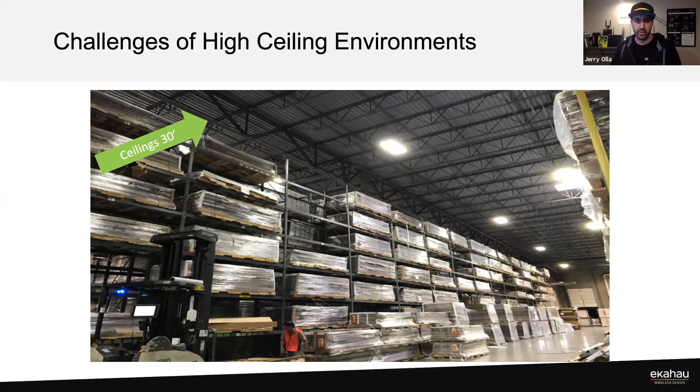Yeah, so some other considerations, besides that 30-foot high ceiling where we're going to place APs, we also have some open space that we need to deal with, and that's created because often we have these metal racks that extend up pretty high, but they don't go floor to ceiling like we do in a typical office space. So they're not going to be a complete wall from an RF standpoint.

And if we have these high ceilings that are 30 feet up, traditionally we put the APs in the ceiling, right? And if we are using omnidirectional antennas, now we have this open space where there's no attenuation, right? The APs can hear each other every time an AP transmits. Every AP that's on those channels or adjacent channels potentially could be hearing that other access point. So there's some things that are unique to these kinds of environments that we don't often have to think about or worry about in an office type space.

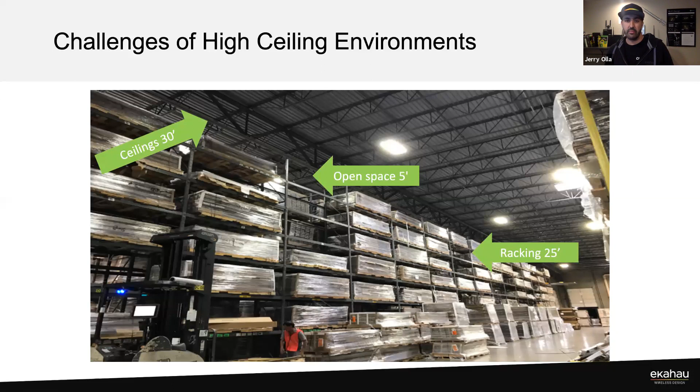So yeah, what are some common mistakes that can occur if we don't factor some of that in? Taking a look at this photo here, this Wi-Fi deployment, it's kind of hard to see. It's a pretty big space in a pretty small picture, but anything that jumps out at you guys, Joe or Scott, of maybe some mistakes in here that you would recommend not doing? Well, first off, those APs are pretty dang close together.

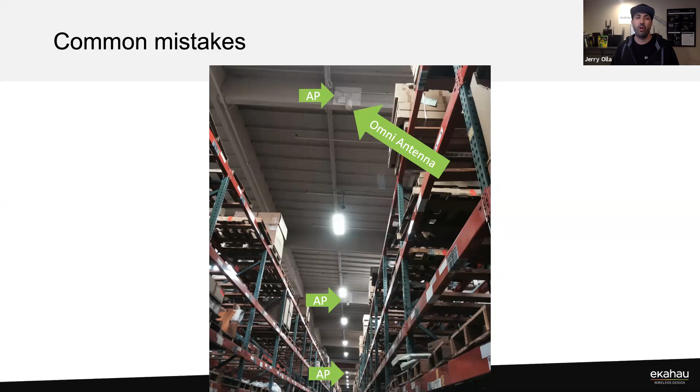Yeah, so I think what you're talking about is you've got an AP here. It's got an omnidirectional antenna on it, not super high gain, but higher gain than your typical little rubber duck antennas. And then we've got another one that's kind of hard to see here. And if you look really closely, there's another one down here. So where you're standing in one of these aisles, we actually have 3 APs with omnidirectional antennas. They're all audible. What potential problems could that create?

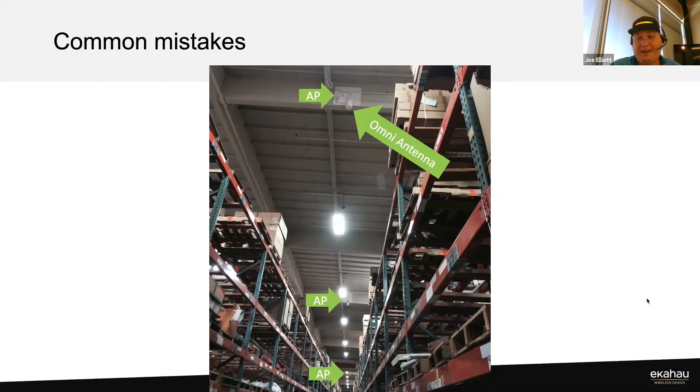For my environments, I've seen it create a bunch of channel utilization and contention issues. Also, because of the racking not being a full wall, I've seen it where every AP in the entire warehouse can hear the other APs, and that's in a 1 million square foot warehouse. So if you can hear 190 APs, it's not a good day for anybody.

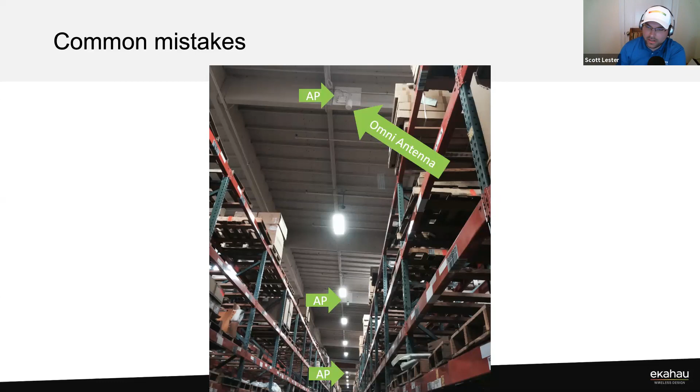Yeah, exactly. I think one of the key things that Joe touched on there was, for those of you that have taken ECSE, you remember the want, don't care mentality, right? Of signal levels and things of that nature. The other important thing to remember is these omni antennas in this particular instance are truly omnidirectional antennas. You see some manufacturers that have omnidirectional antennas built into the access points that have electronic down tilt built in already to help prevent that AP to AP contention and hearing as much from adjacent APs.

However, in this case, when you use these particular omnidirectional antennas, these oil cans, if you will, are just strictly blasting out an omni pattern everywhere, right? There is no down tilt built into these typically. So that's something else to be aware of: choosing the right antenna for the job. Yeah, very good point.

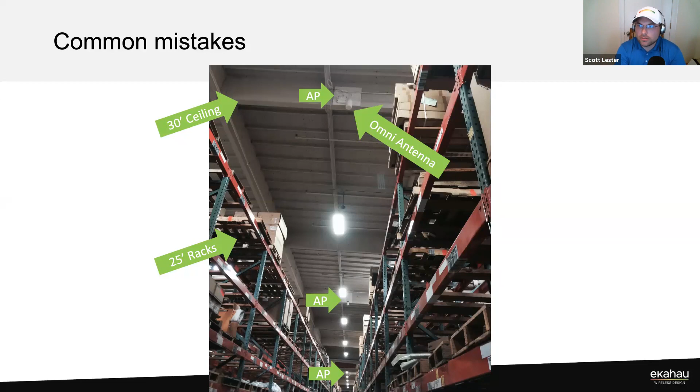All right, so let's talk about covering these large areas. Here we've got a photo. This is a very long, open aisle, pretty wide actually in comparison to some aisles. What we're talking about is, how do we cover these large areas with Wi-Fi? Do we just place a single access point in the middle of the room with an omnidirectional antenna on there? You can actually see we've got one right here in the photo. It's pretty tiny in this image, but is that enough to cover these large areas?

And actually, if we don't have attenuation to work with, we can cover a pretty large area. Would you agree with that, Scott? Can we cover a pretty long, large open area with a single access point? Yeah, absolutely. Just kind of a side discussion around that answer: I do a lot of work in LPV environments like stadiums.

If you put an omnidirectional antenna at one end of a stadium, you can hear that even at lowest power up to 300-400 meters away. In an open space, there's nothing that diminishes that signal, that ends that propagation. So short of free space path loss, that signal is just going to continue on forever.

So if we need to cover these large areas, what are the options? So far we talked about omnidirectional antennas and placing these things on the ceiling. Is that our only option? That's what we're used to from typical indoor environments with office spaces. We're usually using Omni antennas, placing the APs on the ceiling, and calling it a day for the most part.

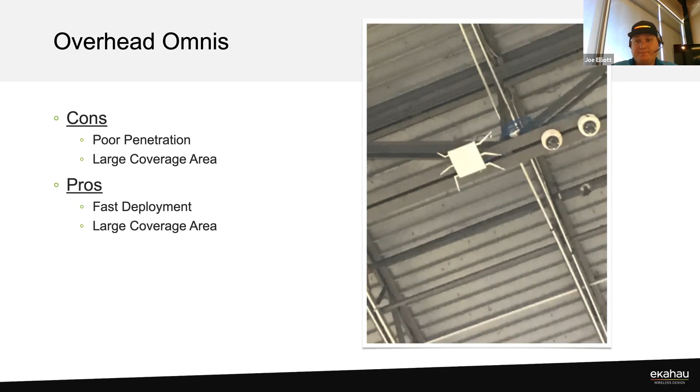Yeah. But it's a good point, Clayton. That's another consideration that's not directly on the RF side, but it obviously greatly impacts the RF if we can't pull a cable long enough to where we want to put the AP because it's outside of the spec of the distance that we can run that cable. So yeah, there's definitely a lot of challenge that adds as well.

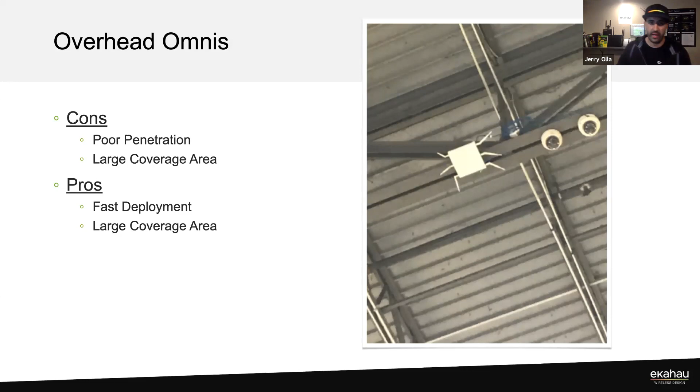Scott, you want to kind of dissect what we're looking at here? Yeah, sure. So this is actually talking about overhead omnidirectional antennas. This is a survey that I did recently of a facility that had that exact mounting scenario. In this particular case, they had the AP mounted on the ceiling rail with the oil can type AP antenna mounted to that, interspersed throughout the warehouse. As you can see, it was essentially 2 per aisle, and they would skip a few aisles and then do 2 more per aisle, spaced apart. This facility was probably somewhere around 400,000 square feet or so.

But as you can see, we'll move right to left in this image. We'll start on the right side of the image where we see a lot of green. A lot of green is good. The Hulk is happy. But if we had the opacity of the signal propagation turned down some in the image, what you would notice is that in this spot, he's moving the cursor around for me, if you'll move to the center of that green blob right there.

So that whole area on the far right of the image is essentially just an open area. It's going to be some type of packaging area where they're putting things in boxes, or they're stacking pallets, putting merchandise on the pallets and things of that nature. So in that area, the closest access points with the omnidirectional antennas, we see great propagation. No problem, signal's good. This is obviously from the 5 gigahertz side, which is what I typically recommend people design for these days.

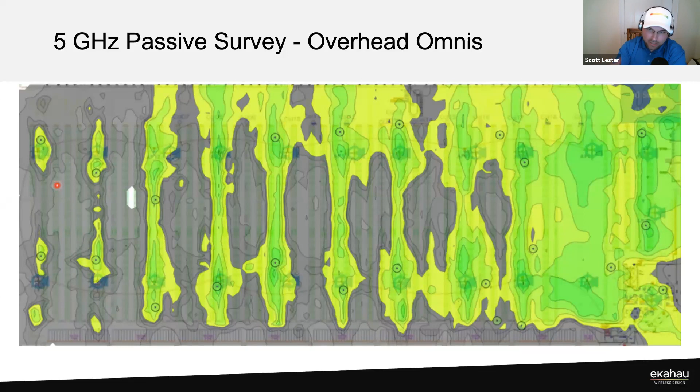So this particular facility is a distribution facility, and has a lot of metal objects inside cardboard boxes on the shelves. So you can see how those materials affect that signal propagation from rack to rack and row to row. Yeah, it's pretty interesting to see the difference laid out like this across the entire building, where it sounds like you've got the same APs, same antenna, potentially even the same transmit power configured on all these, but drastically different results from an RF perspective.

And all these measurements are being taken boots on the ground, about 1 meter or so off the ground. So we've got to get that signal down from the ceiling all the way down to the floor. In a big open area, this design and solution appears to work quite well. But as we add all the density of the objects and the racking, obviously that changes things very drastically. So it's pretty interesting to see, from right to left, how that changes.

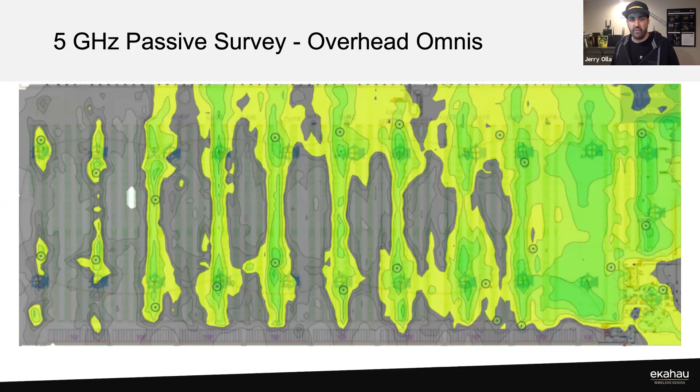So I laid those out, and then I tried to utilize omnidirectional antennas to cover the entire facility within reason. And when I say within reason, there were given budget constraints and things of that nature. So I figured out the maximum amount of access points that I could have used in the facility based on available budget, propagated the design, and did as best I could.

And you still see how in certain areas of the warehouse you start getting tremendous signal loss, even in the predictive phase. And many of us that have done Ekahau for a while can tell you Ekahau's predictions are only as good as the information you put into it. This is based off the most accurate information we could come up with, and we still saw significant loss. So you transpose that into a real world deployment, and typically it'll be close, but in some cases in warehouses you're going to see even worse going from predictive to an actual deployment.

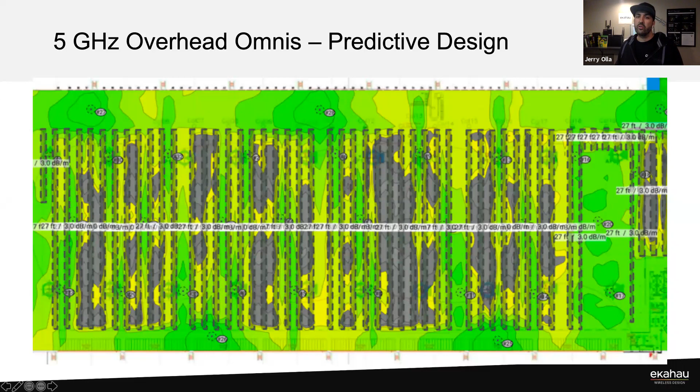I'd say the old school way of doing it, which is the way I still do it, is using the wall tool to define the racks. I would say both can be correct as long as they're defined accurately. But yeah, garbage in, garbage out, right? So as long as we put the right values in those and define those correctly and understand how the tool works, either the wall tool or the attenuation area tool can be used for representing the attenuation of the racks.

All right, so the other antenna option that we have is end of aisle. So this is kind of an interesting one. This is one that I have seen some of our customers use. This is one that I personally have not had much experience using. Scott, is this something that you find has been pretty effective for you? Is this something you use pretty often? What types of environments do you see this working better in?

So this is going to be probably my second favorite, if I categorize things, deployment method. Now, obviously, we'll talk about cons first, right? So the cons of using an end of aisle deployment is that you have potential obstructions. Okay, what do we mean by obstructions? I'm sure everybody's already figuring out, right? Those forklift drivers, you might as well put neon signs on these things if you put them where a forklift can get to them, because I can almost guarantee you in every warehouse facility, you're going to get a few of these hit.

In this particular case, you can see that the access point is mounted to what we call a co-location bracket. We've got the access point there in the middle. You can't really see the antenna, but it's going to be on the bottom of that tilted metal plate there. And it's mounted to just a standard double gang wall box hanging off of the all thread.

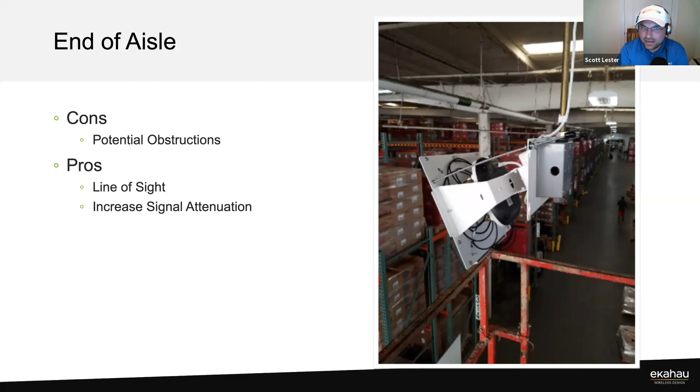And then a second factor is that I find that most access point manufacturers don't actually support the use of that particular antenna. And just a side note, obviously this is not something that the FCC polices very tightly, right? But I feel it would be amiss if we didn't recognize that, according to the FCC, in most cases, the antenna that's used for an access point has to be certified by that access point vendor for use with that access point. And that's mainly to make sure that propagation and the FCC limits are enforced properly. So just something else to remember when you're doing this kind of work.

Now, obviously, we don't go to the FCC and say, hey, can you check this out? I really think that warehouse is probably using an incompatible antenna. But it is something that technically, to the letter of the law, you have to be aware of.

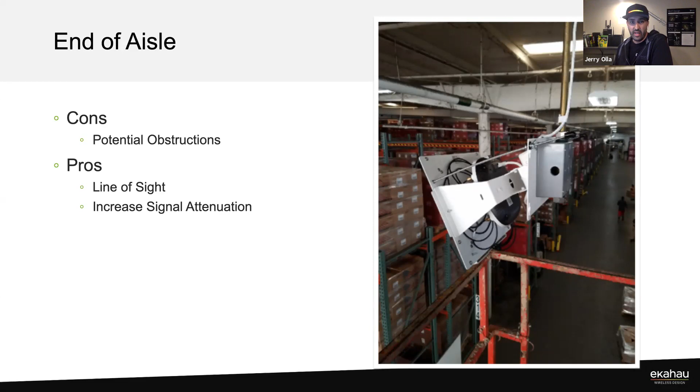Yeah, right on. So there was some interesting stuff during that conversation. I was following chat a little bit there. There's a lot of activity in there, but there was some mixed stuff. I saw at least one positive comment about a customer that did successfully deploy this radiating leaky cable. But there were a couple of people that said that it works good for DAS, but not for Wi-Fi. So there's definitely more options than we'll get into on the webinar today. But that's why we love having you guys on the chat, to introduce us to new things that maybe we didn't think about.

So this was kind of the best of both worlds. It gave us higher capacity. It gave us faster speeds because we're doing more than just barcode scanners, but our barcode scanners are also our least capable device. Gotcha. Okay. Yeah, and we'll talk about devices here in a little bit.

That's a good point. Everything so far we've been talking about is really the environment and the APs and the infrastructure, but there's a whole other piece to this equation, right? The client part of it. So yeah, that's a good point. Anything you want to add to this, Scott? Anything from your experiences? Do you find you're using this more commonly than any other ones?

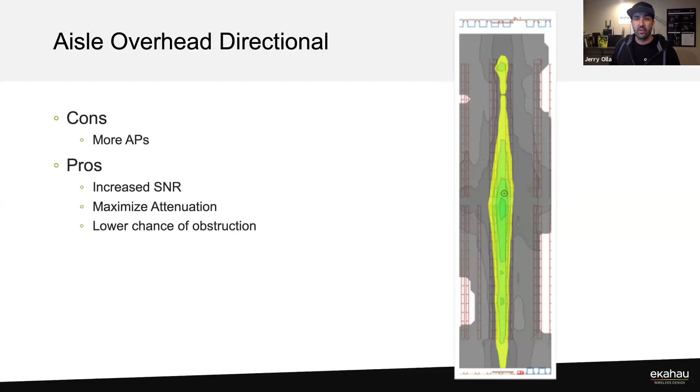No, that's awesome. So I think the real success here is when you look at it overall, right? So this is taking that same concept now of the overhead directional in that same warehouse that we've been using and showing with the previous slides on the omnidirectionals, and how much better the coverage is. I don't know AP quantity wise, I would assume you probably are going to need some more APs with this approach, but from an RF quality standpoint, you're going to get a much cleaner environment, right?

Yeah, absolutely. I think in this particular facility, we more than doubled the total AP count from where they had to what we went to. In some cases, depending on how the original design was done, it may be as much as 3x. So obviously, there is a much greater cost for this deployment method. But at the end of the day, you have to find a solution that works for the customer to meet the requirements of the project, both from a technical standpoint and a business standpoint.

In most cases, I've had a little bit of pushback from some customers on utilizing a solution like this. But this actually is done from the same drawing that the passive survey we first talked about for propagation for Omnis was measured at. So when you can show the customer in real life that this is what you're currently seeing, this is what we recommend going to, and this is why, and you show them attenuation loss between racks and things of that nature, right?

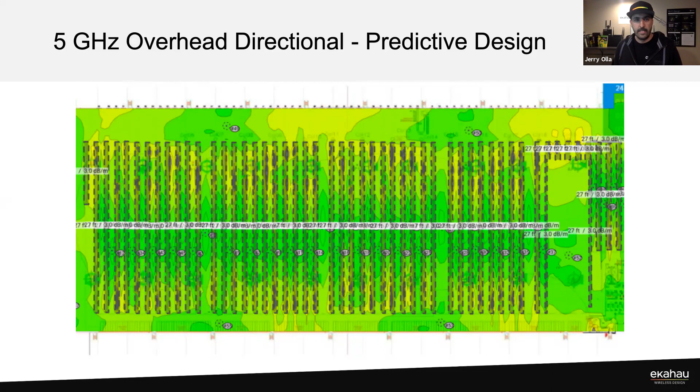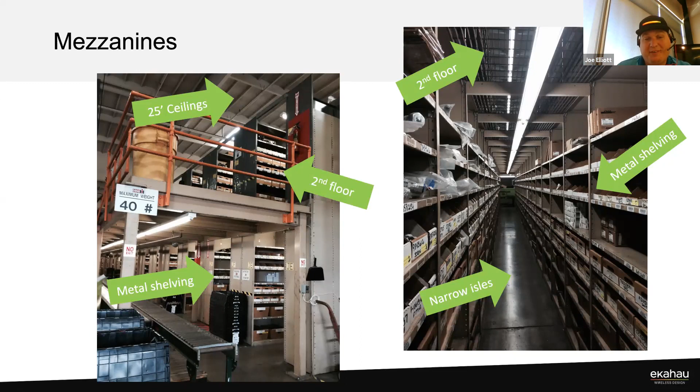So when I first designed it, they're like, oh, there's only 5 people that work in each level of this. I'm like, okay, that's pretty easy. Well, come to find out, during busy season, there's about 25 to 50 people per level of the mezzanine. All of a sudden we're not getting the throughput requirements that we need to be successful.

Yeah, so the interesting thing with this one is originally when I came into this project, they were really struggling to cover more than a couple aisles of this mezzanine. And this goes back quite a ways. This is a pretty large mezzanine. It's hard to tell in these photos, but you can see this thing keeps going pretty far. And shooting down the sides wasn't really an option, because just to the left of this photo is another tall rack, and on the other side is a concrete wall.

So there wasn't any easy way to do what we talked about before of shooting down the aisles. So the only option was to go overhead. The ceilings were about 25 feet. My concern was that this metal grid flooring above was going to block a lot of the signal. Thankfully, the spacing must have been wide enough, or it didn't have any impact on the signal. So I was able to shoot down from above all the way through the second floor down to the first floor just fine.

The tricky part was just getting above this racking structure for the cablers to get in and actually install these directional antennas. So I took that same approach we've been talking about, the overhead directionals, and we put several overhead directionals over the top of this mezzanine and shot down from above to below. So we were able to cover the second and the first floor with those directionals over the top.

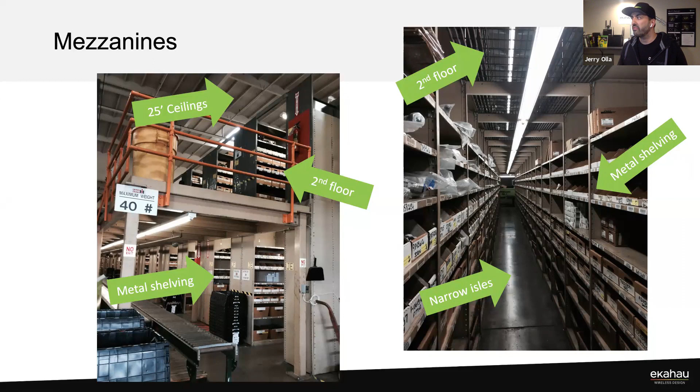And yeah, same concept. I think when you've got 2-story or 3-story, it depends on the flooring, obviously, is the biggest factor there. If you've got solid metal floors, you're going to have a hard time getting through that. You're going to have to come up with a different solution. Thankfully, in this case, with that metal mesh or metal kind of grid flooring, I was able to leverage that to get the RF through.

Well, cool. I think we're running a little bit behind on time, but I think this has been some good stuff. I wanted to just talk quickly about Wi-Fi design methodologies, and then see if we can apply some of that in some kind of a live demo here in the Ekahau application. So yeah, Joe, why don't we start with you? What is your Wi-Fi design methodology today? I don't know how much detail you can go into, but at least, what are some of the concepts behind that?

I'd say we're picking and choosing quite a bit. So we always do a predictive design through Ekahau. And then depending on the circumstance, like the mezzanine we were just talking about, I'll do an AP on a stick there every time just to make sure that we get the coverage patterns we need. But otherwise, we'll go through and deploy part of the building sometimes and do a hybrid, so you just validate that what Ekahau says it should be is what we're really seeing. And then we'll move on with the project from there. And once the project is finished, we'll do the post-deployment validation survey.

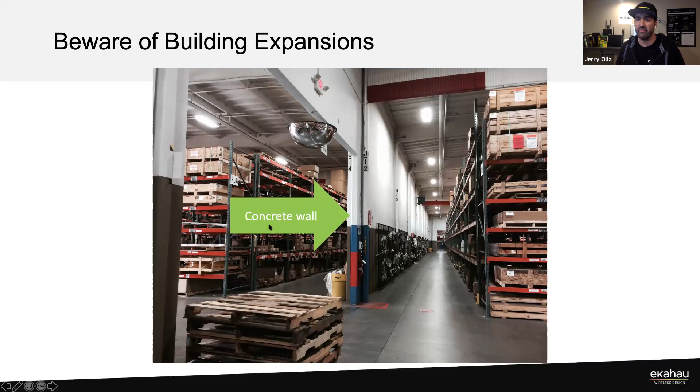Yeah, and that was an interesting one for us when they did the expansion. We had that external concrete wall, just like you're showing, and so this was before my time. They hired an external company, a system integrator, to come out, and they never accounted that was an exterior wall. So there's just a giant dead zone on both aisles going down that concrete wall.

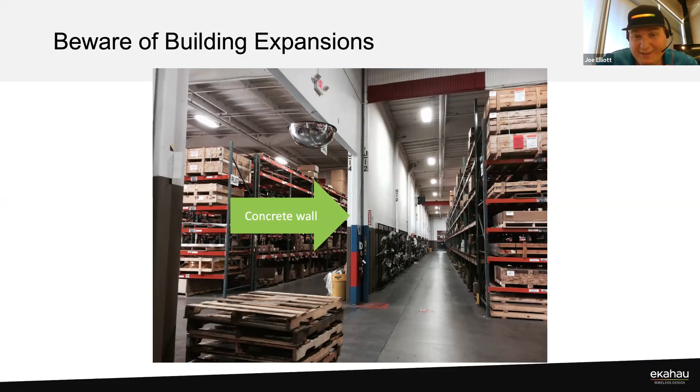Yeah. How about you, Jerry? Do you have a typical Wi-Fi design methodology? I'm sure it depends for you with all the different environments and stuff that you're working in. But if you had to try and kind of form that into a common methodology, what does that usually look like for you?

So for me, obviously we're going to do a little bit of probably every solution out there. So typically I'll start out with recommending a passive survey of the existing facility to see where we are. If this is a greenfield facility or a brand new facility where they haven't deployed wireless previously, then obviously we try to get as accurate a drawing as we can. The number one issue I typically face in warehouses in general is getting a map, and in some cases that's any map.

The more accurate the map, the better we can do our job from a predictive standpoint. After that, in that predictive phase we'll send somebody on site, make sure that if the facility is populated, we can measure the attenuation values and things like that to properly form our predictive. Then we'll go in and do an AP on a stick.

Now, I saw a question earlier. Somebody asked, how do you do a project like this when the customer doesn't want anyone on site? They just want to provide a drawing, and then they want you to do a post-installation validation survey to make sure that what you put up worked.

In that case, what I always recommend is encourage your customer to let you come on site, even sometimes if it requires you to take the expense out of pocket initially to make it up on the back end of the project. We really cannot do our job effectively as professionals, even with amazing tools like Ekahau, without having as accurate information as we can up front to do the design with, and then test.

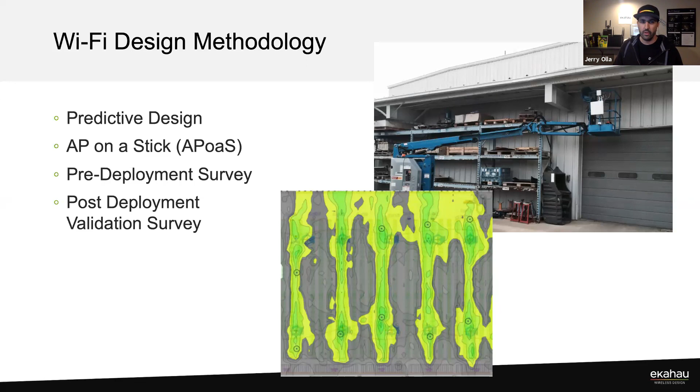One thing I just want to point out, this seems like a no-brainer, but if you are using a lift, make sure it's out of the way. Make sure that the lift isn't impacting your access point, and that you have the antennas mounted in such a way that it's not traveling through the lift. Yeah, that's a good point. You do have to take that into consideration with your stick. If your stick is made out of metal, you want to make sure that that's clear of where you're measuring that signal.

Okay, so a couple other things. We talked about stock fluctuations. We showed the impact on the heat map, so I won't really spend much time on this. But make sure that if you're surveying, pay attention to what the stock level of the warehouse is, and talk to the customer about that and see, is this normal? Is this low? Is this high? And take that into consideration in your design and your validation.

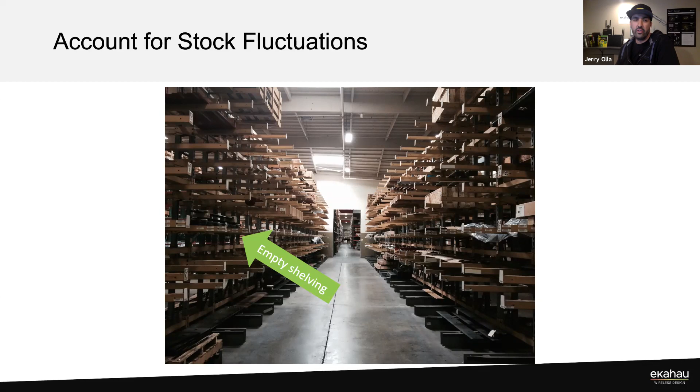This is one of these things that we've kind of overlooked a bit in this presentation, but I think is very critical: not all devices are created equally. Here's two different barcode scanners, an older and a newer one, right next to each other. The older one probably has been dropped a few more times than the newer one. And this is just walking around with these two devices. So don't just grab one device. If the customer has 5 different models of devices, you want to test with all 5 different models, and maybe even a couple of each model to really get a good baseline of what the capabilities are of these devices.

Is it something that's fixed to a forklift with larger antennas, those kinds of things? Or is it a very small handheld device that somebody could be putting in their pocket, or sticking somewhere, that's going to have worse receive sensitivity from that? But yeah, here you can see we have a pretty big dB difference between these two devices, and you can notice the impact on the transmit retries with that as well.

Jerry, I'll add one thing too on the devices themselves: not only be aware of what channels they support, but try to find the documentation for the device itself if you can. There are some scanners out there that I've seen, I believe they were Intermec scanners, some of the older models in particular, that supported all 5 gigahertz channels. However, when you started drilling down into the details, they supported UNII-1 channels at, say, 50 milliwatts transmit power. They supported UNII-2 channels at, say, 25 milliwatts of transmit power.

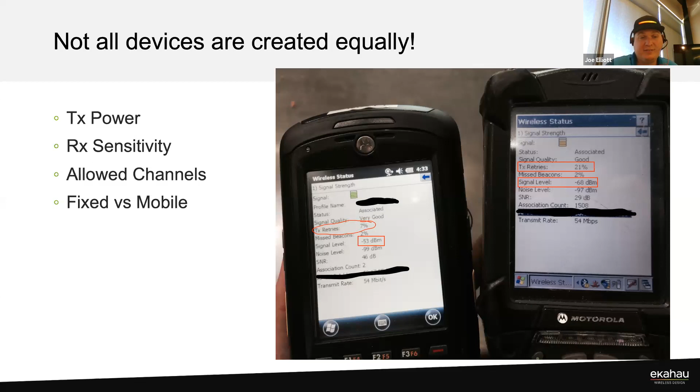Yep, definitely. Good tips. Well, I see we are already at the top of the hour. It took a little bit longer to get through that content, but I think we had some really good dialogue with the audience and questions. Clayton, do we have some questions that we were not able to answer yet? Oh man, a gazillion. Just a couple, huh? Yeah, I've been trying to type as we talked, but apparently this is a popular topic.

Yeah. So there were a couple that are very popular here that have been addressed. One that pops out to me here, again, going back to attenuation areas versus walls, using a wall to define the racks in predictive designs.

Yeah, so let's talk through a couple of these questions, if it's okay with our special guest experts here. Do you guys have maybe another 10 or 15 minutes to stick around and try and answer as many of these questions as we can? I'll stick around. Awesome. That's gonna greatly change the hourly rate that you guys are paying. We're going into overtime. I don't know if we can afford Scott's overtime pay.

All right, so here's the first question from Nick. It looks like it was the most upvoted question. What do you tell a customer who insists that he does not want an on-site survey? We have one who wants predictive modeling and an exit survey. We know that this is not a good idea, but what do you tell a non-technical person that will convince them otherwise? Very good question.

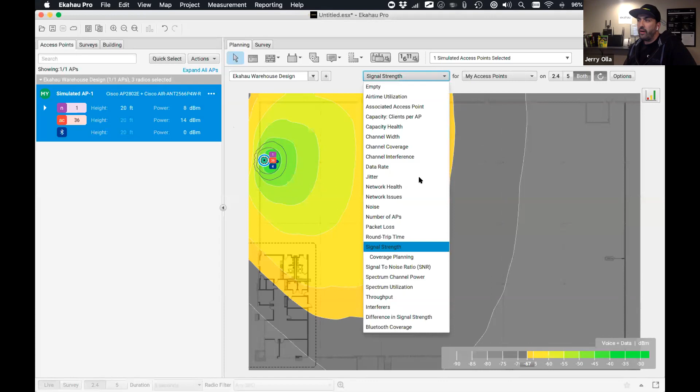Yeah. So the attenuation area is the best way to account for rack width. That is actually something I think we can do a quick demonstration of. Joel, are you still on the line and able to? Yeah, I totally am. So you want to demo the difference between walls and attenuation areas? Is that what you want? Yeah, exactly. So I mentioned this during the slides of how do we account for those racks, the attenuation of the racks, and there's two different ways that we can do it in Ekahau, right? Either the wall or the attenuation area. You want to show how we would use either one of those? Sure.

Yeah, so let's do a wall first. Scott and Joe, I might have you guys call out some attenuation values, because I don't have any warehouse experience, so maybe you can tell me some realistic values to put in here. So the first way is to use a wall. With the wall tool, there's a warehouse shelf preset in here, and by default it's going to wipe out 27 dB as RF passes through it.

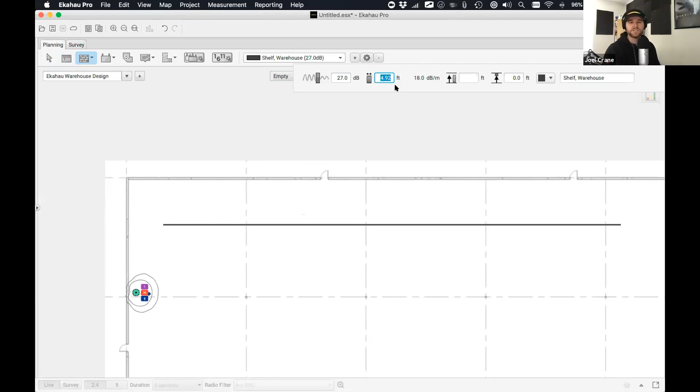When you draw a wall, basically you're drawing a line from one end to the other, and we're going to predict what happens to RF as it passes through that. You can also define a width. If we edit that, the total width of this is currently 4.92 feet. Scott and Joe, is losing 27 dB through that realistic at all? What's a realistic value to put in there?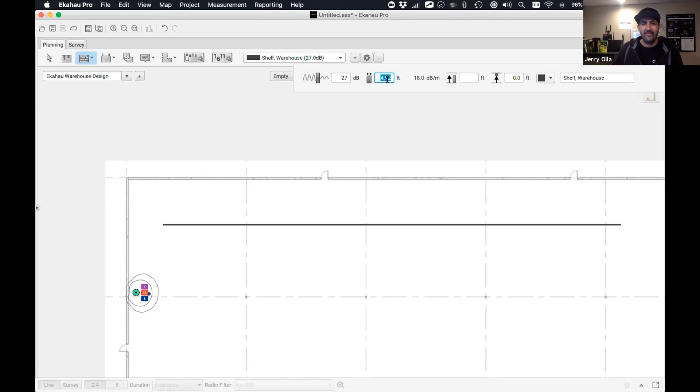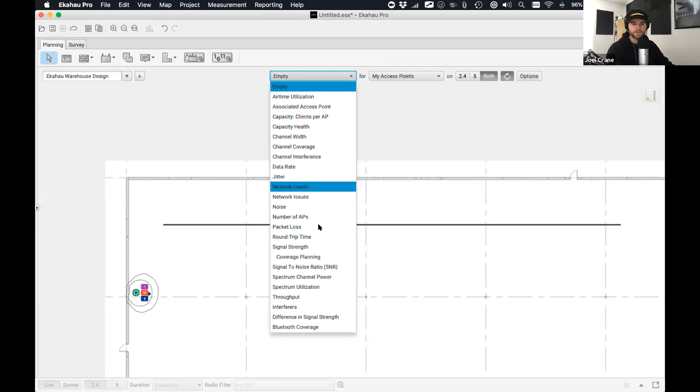And so what's a typical warehouse width of a rack that you would see? Jerry, what's a pallet? I don't know off the top of my head, but 7-8 feet total, maybe. So 8 feet is what I generally design for. Okay, so we'll say 8 feet, and now let's turn on our signal strength. We've got a directional antenna placed 20 feet off the ground with 45 degrees of down tilt. You can see I've defined those options right here. That's what it looks like when we use a wall.

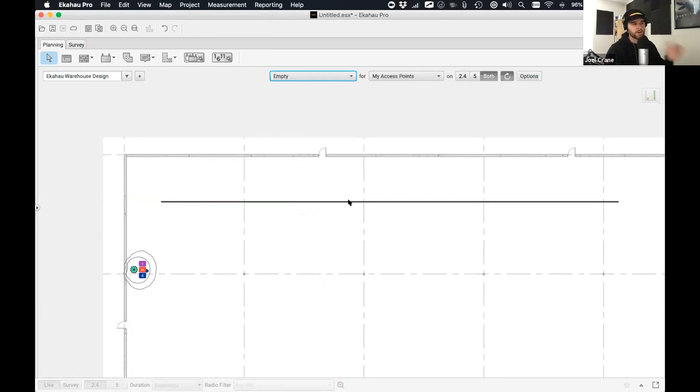Remember, we've defined the height, the width, and the total amount of attenuation as RF passes through that. The other way is to define an attenuation area. Instead of drawing a straight line, we can draw a box, a long rectangle, and change what that attenuation area is. We'll grab the warehouse rack here. Attenuation areas work a little differently: how thick is this in total, and how many dB are we going to lose per meter as RF travels through it.

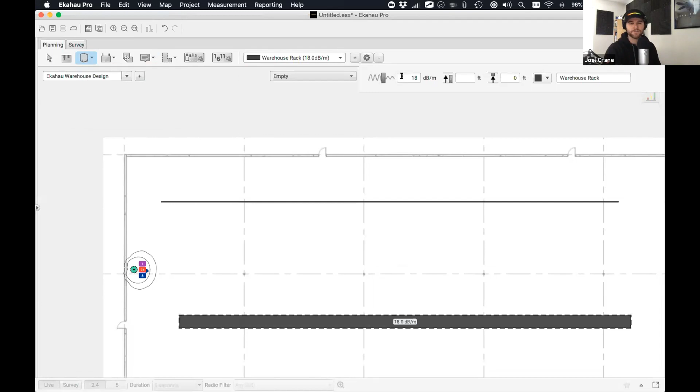Notice this says we're going to lose 18 dB of RF per meter that we travel through it. So the thickness is defined by how wide your attenuation area is. We could grab the scaling tool and see what I defined there. So I defined a 9 foot wide rack there.

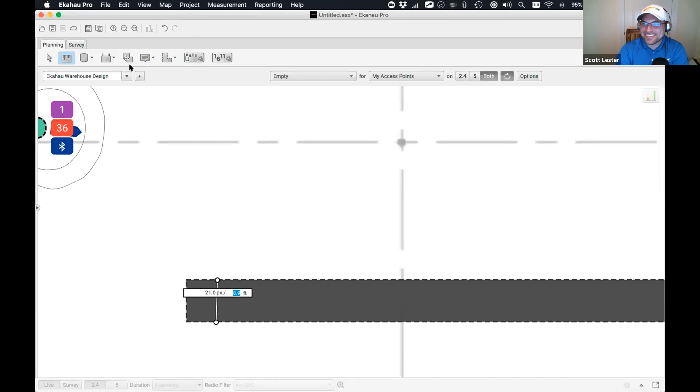One thing that can make that easier: I'm doing this in feet, or freedom units as I like to call them. But it's a lot easier to calculate if we switch over from feet to meters. Now when we look at how wide that is in meters, that's 3 meters wide. So you can basically do the math and figure out what that's going to look like in the real world.

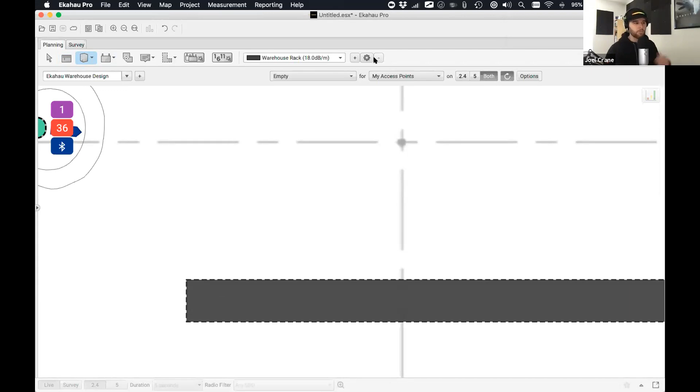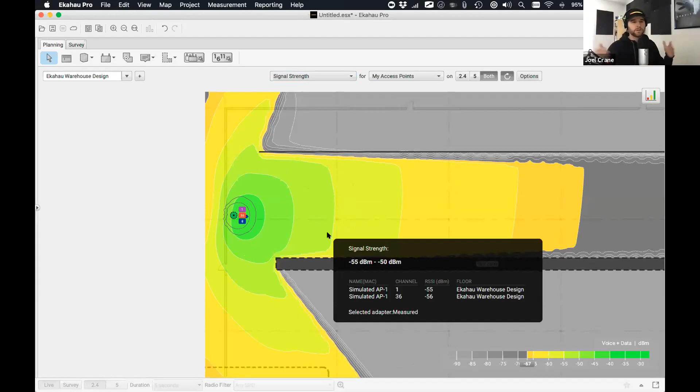So let's just run the signal strength visualization one more time. And there we go. So now you can kind of see two different ways of doing the same thing. So Jerry and Scott, what is your preferred way of handling racks in warehouses? Do you use walls and make them wide, or do you use attenuation areas? Or do you do both?

I mostly do walls, and then copy and paste is your best friend if you have a lot of racks that are the same length. So you'll kind of define one thing. We can do that with, so here I just did a Control C and a Control V, and now we can start placing some, and we'll do a couple with the walls as well.

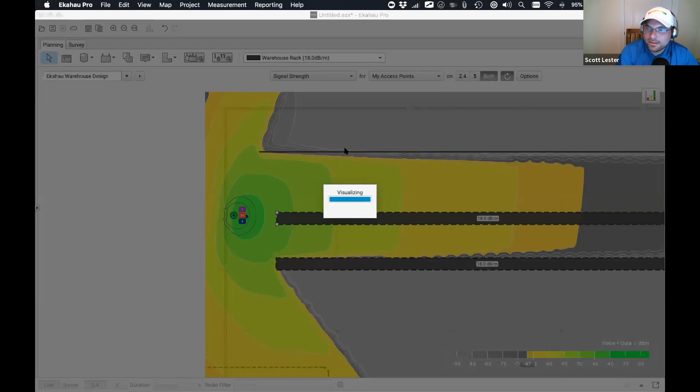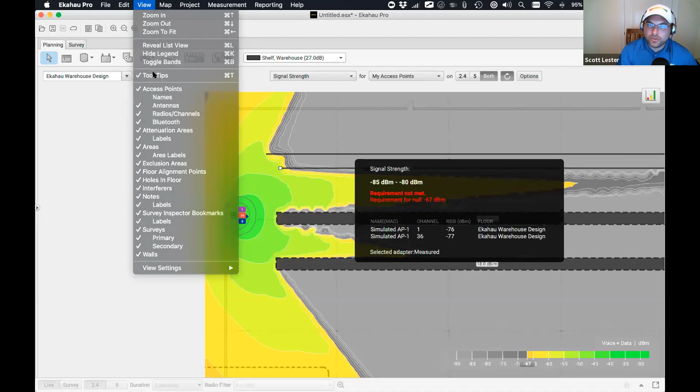Well, I think what I use is pretty evident. I like attenuation areas better. I feel like from a graphical standpoint, it does a better job of actually representing what the actual width and all of the rack space looks like in the environment. And obviously from an integrator standpoint, a lot of what I do is provide reports and things of that nature to customers to represent these things in real life.

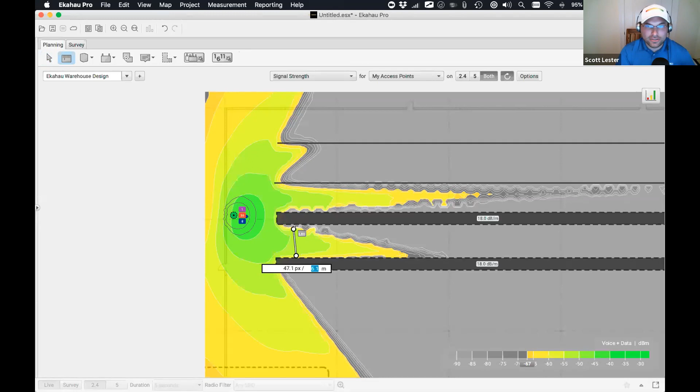And sometimes if you use a wall, even though they have the same identical attenuation values between the two, it's a little bit easier for customers to see the attenuation area and immediately understand what it is versus just seeing a wall drawn into the picture. Yeah, absolutely. That is a pretty compelling argument for why to use attenuation areas versus walls. And I'll add on to that.

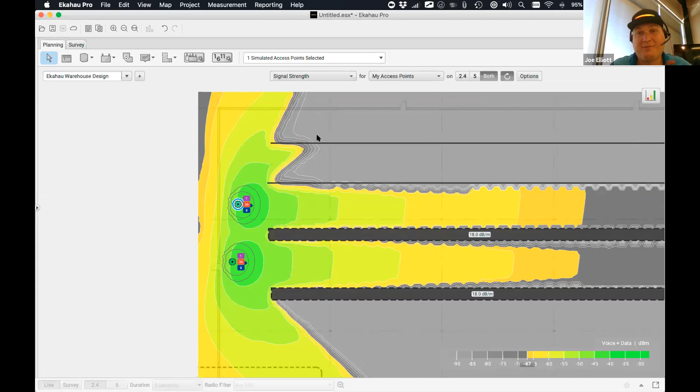Scott is in a different situation. I almost never generate a report whatsoever because it's only for internal use. So it's whatever is easiest for me. Totally. Yeah, and I'm with Joe. I feel like I'm kind of stuck in my ways and doing it the old school way, because the area attenuation tool is newer than the wall. We've had the wall attenuation tool much longer than the area.

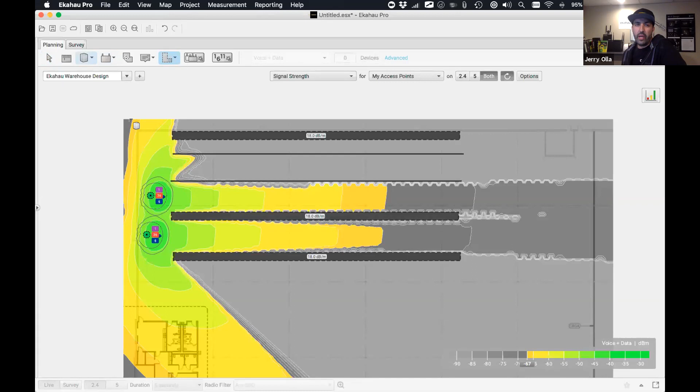So I started on walls and just got used to it and kind of learned the quirkiness of that, and know how to work around those things. So I guess I'm just kind of stuck in my ways. I think both work well. You just have to understand the differences between the two.

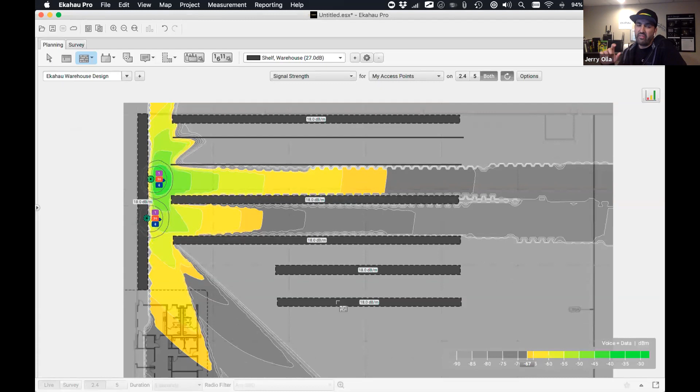The biggest mistake that I see made when using the wall tool is people draw a wall around, like a box around the entire rack. Yes. And you see how Joe just drew a straight line and defined the width of that. That's the proper way to do it. You don't want to draw a box around there using the wall tool, similar to how the area attenuation tool draws a box, because now you're saying there's attenuation in both directions of that wall around the box.

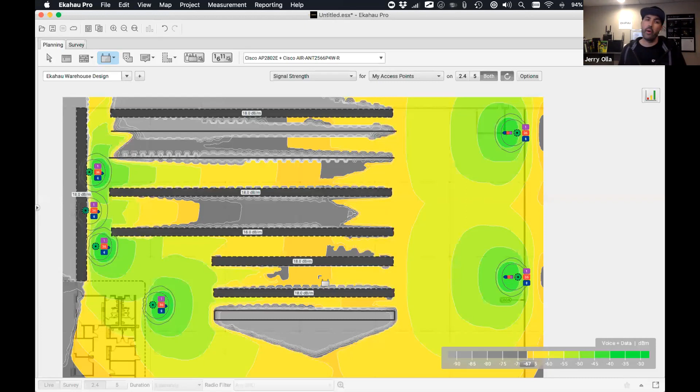Well, and think about it too, not only do you double the wall, so you double the attenuation, you actually have free space path loss calculations in between those two walls as well that make the attenuation even greater. So you're not just doubling it, you could be over doubling it. Actually, in all cases, I should say. Yeah, so there you can see Joe drew, using the wall tool, that box around the rack, and you definitely don't want to do that. That's definitely going to skew your results.

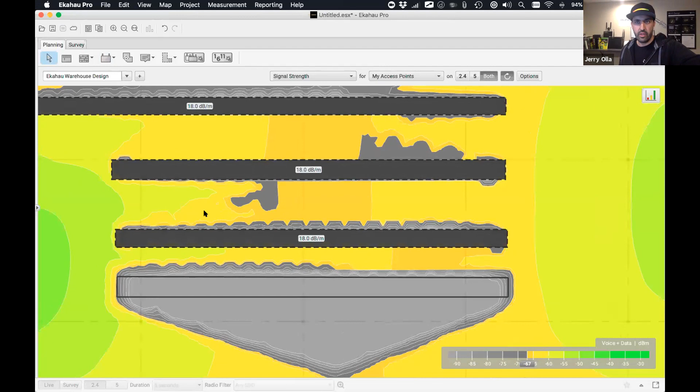I did see a couple of things in chat real quick here before we return to the questions. How do we define that directional down tilt that we were talking about? You want to show that real quick, Joel? Really great question. So I did that ahead of time when I was setting up. I had a feeling that we were going to do a quick last minute demo.

So when I place a simulated access point here, you can set the height right here. And this is brand new in Ekahau as of yesterday. By default, all two, or in this case, all three of our radios get the exact same height. They're all 6.1 meters off the ground.

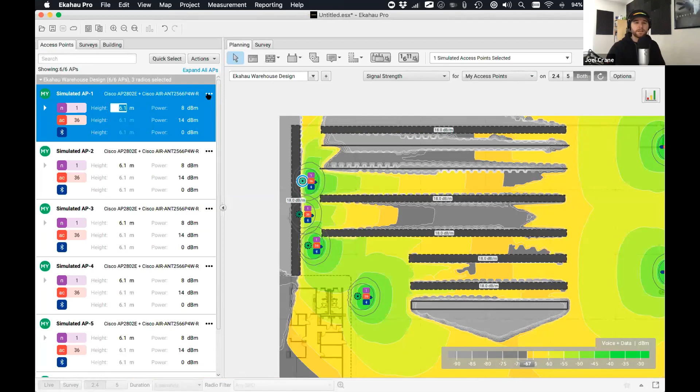That's about 20 feet. No, I did not do that calculation in my head. I can't do that. I let Ekahau do that for me. So we can set the height right there, so they're 20 feet off the ground. And then if we click on the ellipses icon here, there we go. We can actually define the down tilt right here.

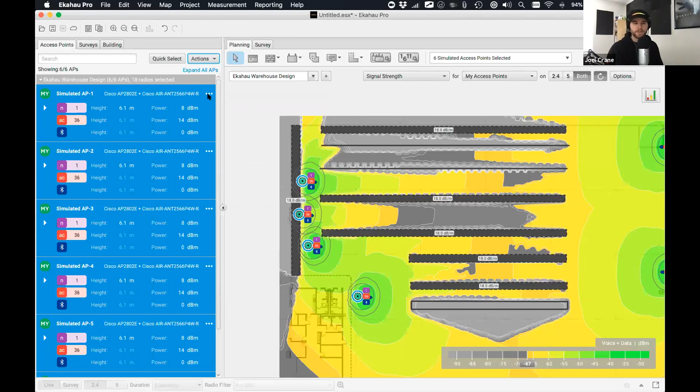So let's do like a bulk select on all of these. I'll just select all of them, and then we'll edit the selected radios. If we change those to 0 degrees of down tilt, notice that the elevation tilts up now. This is what would happen if we just pointed all of those, or did it not apply for whatever reason? What did I do wrong? Okay, let's try again. 0, we check it, and then we hit OK.

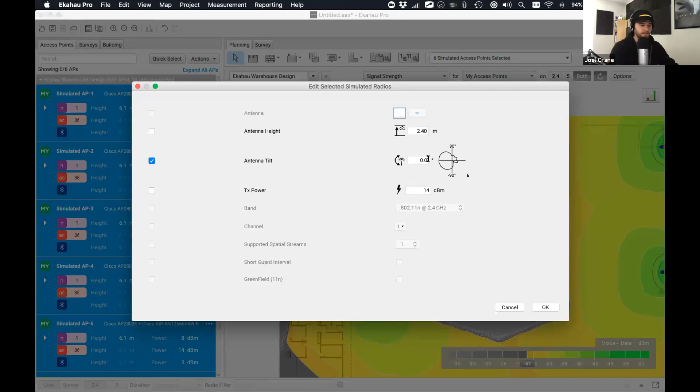Oh, you got it. It shows on my screen. What's that? I don't know. It might be just lagged, but it showed it was unchecked on mine. Yeah. Okay, let's try that again. We go to 0, and then we go to OK, and there we go. Watch as the technical trainer learns how to use his own software.

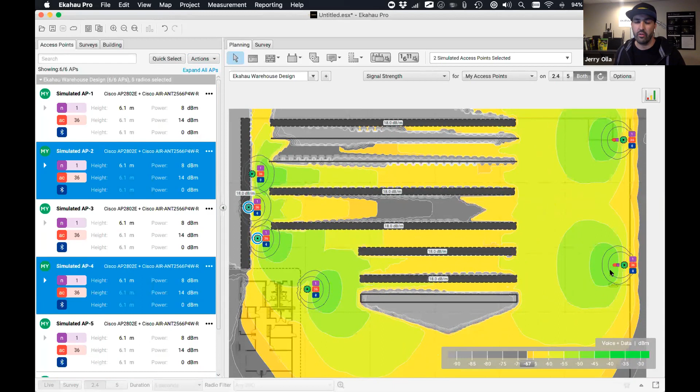So now we've changed the model. All of those antennas are just pointing straight out across the top of the warehouse. They're not getting that proper down tilt that we might want to apply to get that coverage down to the floor where it's needed. So that's how you change all that. That would be similar to if you're designing more for that end of aisle, right? Although Scott, you probably put some type of down tilt on there, right?

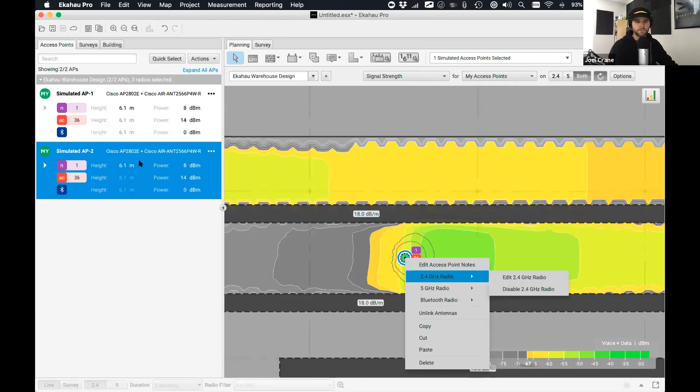Yeah, so typically when I'm doing the overhead middle of the aisle shots, if you will, with the highly directionals, I'll position the AP, and then it'll be straight down. So it should be -90 in most cases. So let's do that real quick just to illustrate what Scott's talking about here. Here's our AP. What I can do is basically just right click on it, and we'll just do it over here. We can hit the ellipses, and then we can say -90.

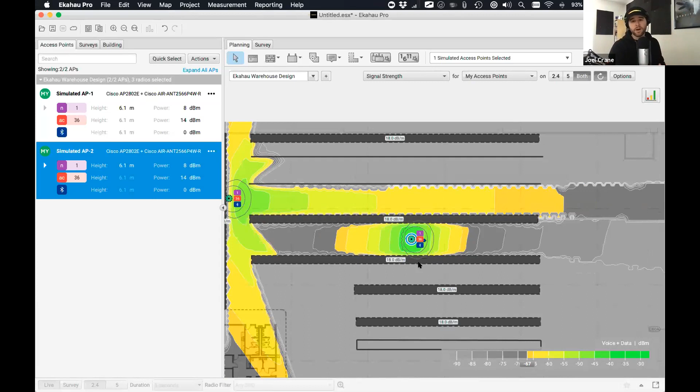And so watch what happens to our elevation pattern. Now that's pointed straight down. And this is probably the completely incorrect antenna to do this job. It's probably too narrow of a beam width, but you get the idea of how I did that. Now we've pointed that antenna straight down. And that's the beauty of predictive modeling, is you can play with antennas and figure out which antenna.

I'm super lazy. I look at which antenna I want in Ekahau, and then I go do the rest of the specking out on the antenna. So Ekahau is how I select antennas. That's probably wrong. That's how I do it.

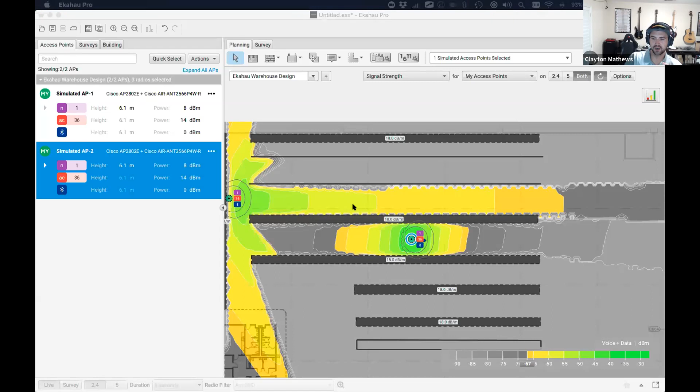Hey, Joel. While you're here, there was a question earlier about the visualization height. So if I have my APs up at 30 feet, is Ekahau displaying the wireless signal at 30 feet? That is an excellent question. By default, it is showing signal strength 1 meter off the ground. Now you can change this. It's kind of a hidden feature. So this is what signal strength looks like 1 meter off the ground.

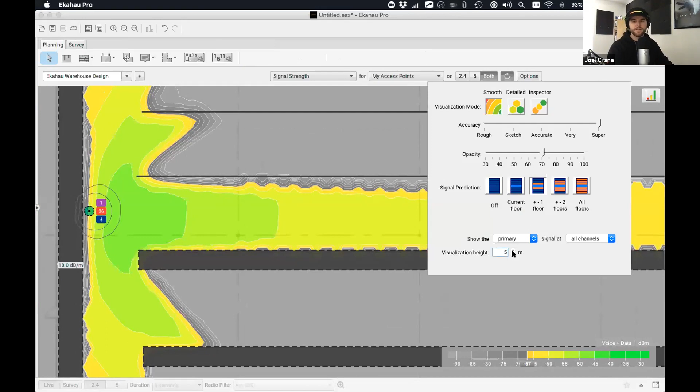If we hold down the Alt key, or the Option key if you're on a Mac, then you get this visualization height option. So what if we want to know what signal strength looks like 5 meters off the ground? We can change that to 5. And now Ekahau will visualize what signal looks like 5 meters up. Very helpful if you have hand scanners that need to go down to the floor, right? You got to get that bottom shelf.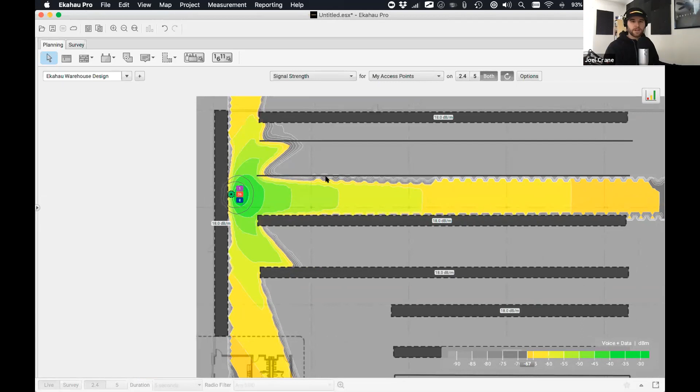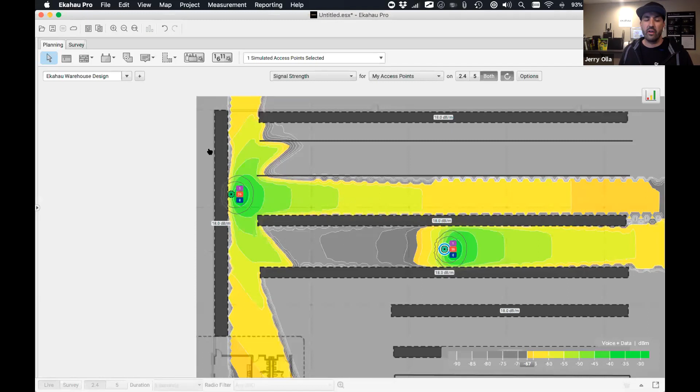Hey, Joel, which version of Ekahau Pro are you running here? Oh, that's a great question. I am running Ekahau Pro 10.0.1. Notice one of the things that he just demonstrated there is new in 10.0.1, the down tilt of the AP. Previously, you had to edit each radio individually, and now the rotation and orientation are linked together. So when you edit one of the radios of a specific AP, the 2.4 and the 5 radio in this case, it should adjust the orientation for both.

So I just edited the 2.4. If we head over to the 5 gigahertz radio, look, it's exactly the same because it's literally the same physical antenna. And I know you can unlink that. I actually don't know how. How do you unlink? Under the edit, under the actions. Oh, okay, gotcha.

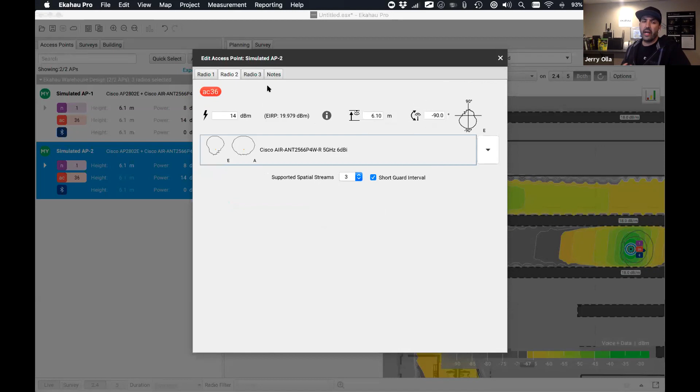You have the AP selected, and then go to the actions menu there, and you can change it. Right click on it, unlink antennas, boom, there it is.

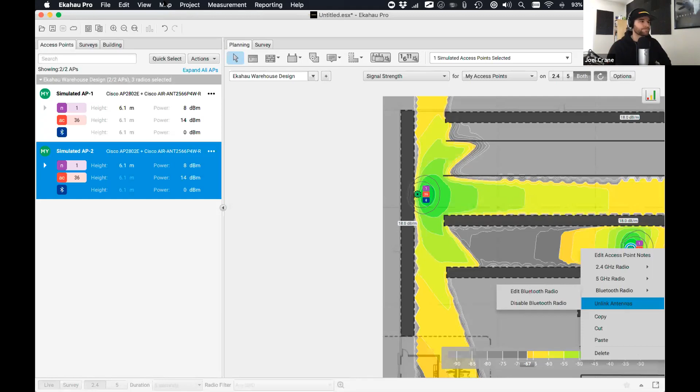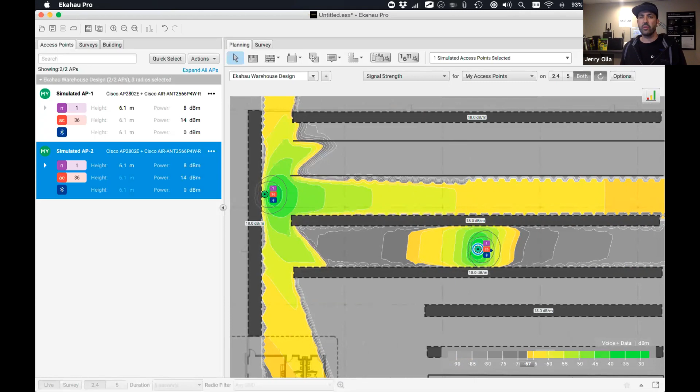All right, so we do one more question. We'll take the top voted one here. We've got one more from Joe: can we talk a little bit about legacy 2.4 gigahertz devices like label printers and barcode scanners in these instances? Yeah, Joe or Scott, you guys have any kind of experience dealing with that? Joe, are you guys still leveraging any type of older printers or anything like that in your environments that leverage 2.4?

Actually, no. All of our devices are 5 gigahertz capable, except we had one new device, and this is brand new, that they brought in that's 2.4 only on our 5 gigahertz only design. A brand new device that's 2.4 only. Interesting. Yeah, so the devices for forklift operators, they have to log in and it downloads what they can and can't do with it, like top speed, or if they get in an accident, it reports it back to us. So all I ended up doing for that is spinning up the 2.4 again and then making it a 2.4 only SSID. Okay.

Yeah, so I see a lot of 2.4 devices still in warehouses. So when I say designed for 5 gig, obviously I don't mean alienate your 2.4 entirely. We still typically do provide both bands in the warehouse. And as far as splitting SSIDs, some people recommend having a warehouse and then a warehouse 5 gig or something of that nature. So you split bands between the SSIDs, warehouse fast, warehouse slow, however you want to name them. It depends on the manufacturer.

If you have some of the proprietary tools like Aruba's Client Match and things of that nature, splitting the bands, you don't really see a big difference in preferential treatment between what the device chooses, whether it's 5 gig or 2.4, with all things being equal from a coverage perspective. What I typically recommend these days, if you are looking at 2.4 gig devices in your facility, try and utilize something like a workgroup bridge that will allow you to use an enterprise class radio to communicate back to the wireless network, and then have an Ethernet handoff on the backside of it. I've successfully used those in a number of warehouses.